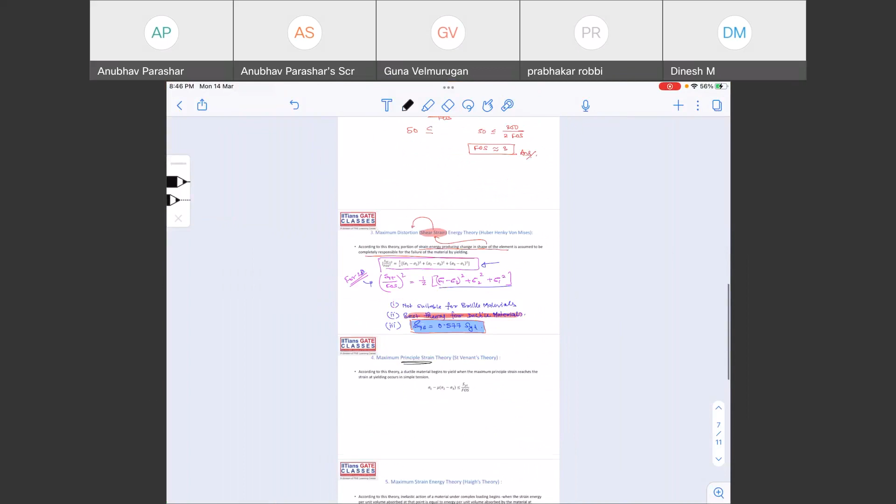So we were here, somewhere here last class. We have seen few things in theories of failure. We have seen what is a failure, why theories of failure are required, and we have seen maximum principal stress theory.

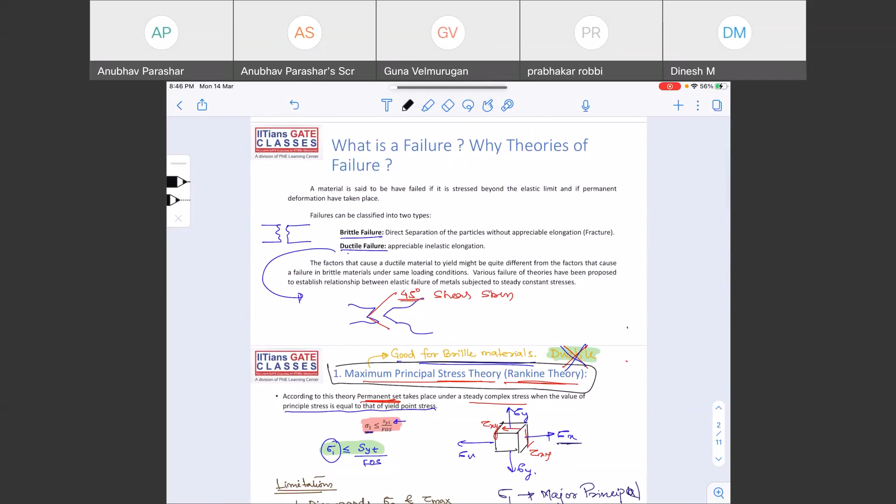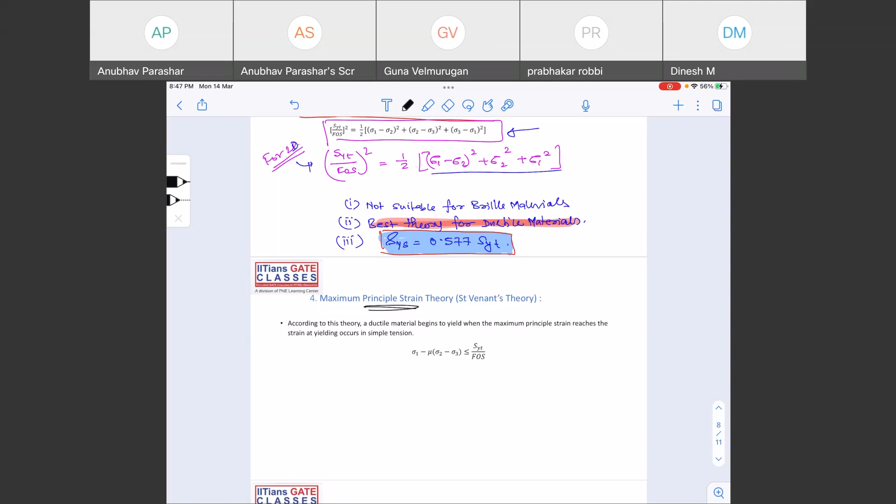We have seen maximum shear stress theory, and we have seen maximum distortion energy theory. Apart from this, there are two other theories which are not very important because they are not much used, and hence there are not many questions from this. But still, let us know these theories and the small side questions that might be asked. So the fourth theory we will talk about is the maximum principal strain theory.

Maximum principal strain theory is also known as the Saint-Venant theory. According to this theory, a ductile material begins to yield when the maximum principal strain reaches the strain at which yielding

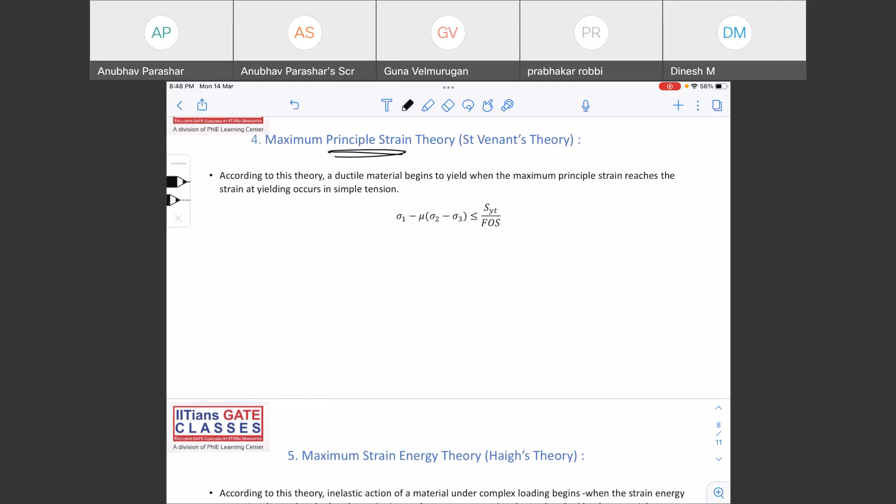occurs in simple tension. All of us know what a simple tension test is, right? It is carried out in the universal testing machine. So whenever the tension test is being carried out, the point, the strain at which the yielding occurs, when a ductile material reaches that point, that strain,

just hold on. When a ductile material, just hold on, give me 1 minute. Just give me one more minute. Hold on, guys. I'll just share another PPT. Where I have got some new questions. Just hold on, give me 1 minute. Yeah, I think I have got it. Just hold on, give me a few more seconds. Let's see on my screen.

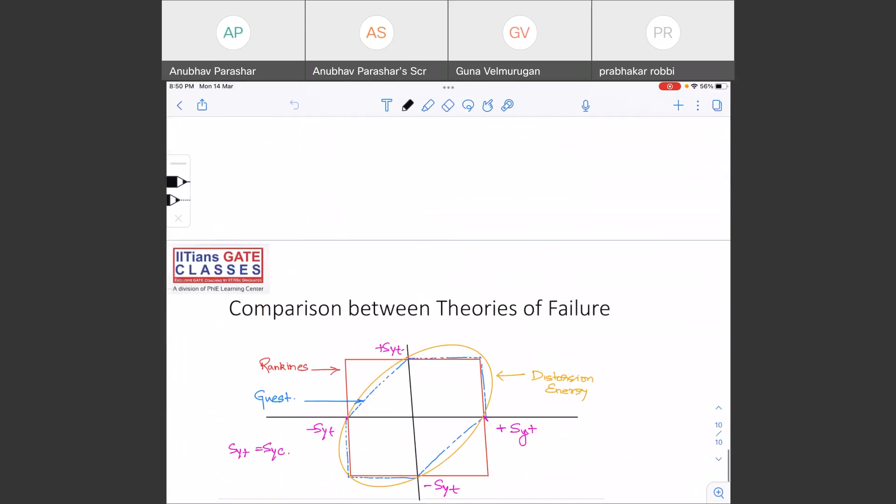Just hold on. Just hold on. Just hold on. It is now. Just hold on. I'm just there. Just about to share. Okay.

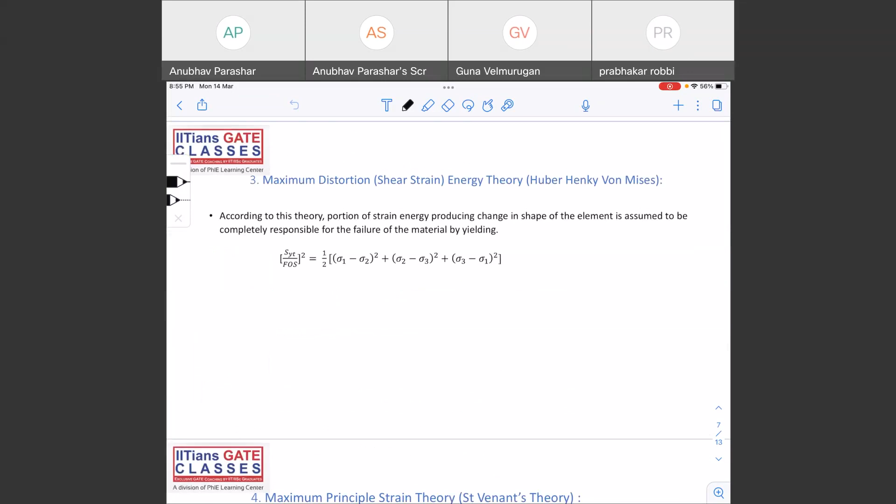So we have seen it till yesterday's class, till maximum distortion energy theory. We have learned where to use each. There are two other theories which are not asked very frequently. Very seldom do you find questions on them, because the first three theories are the ones which are most practical and give better results, and they are easy to apply, so they are being used. And we know which one is the best.

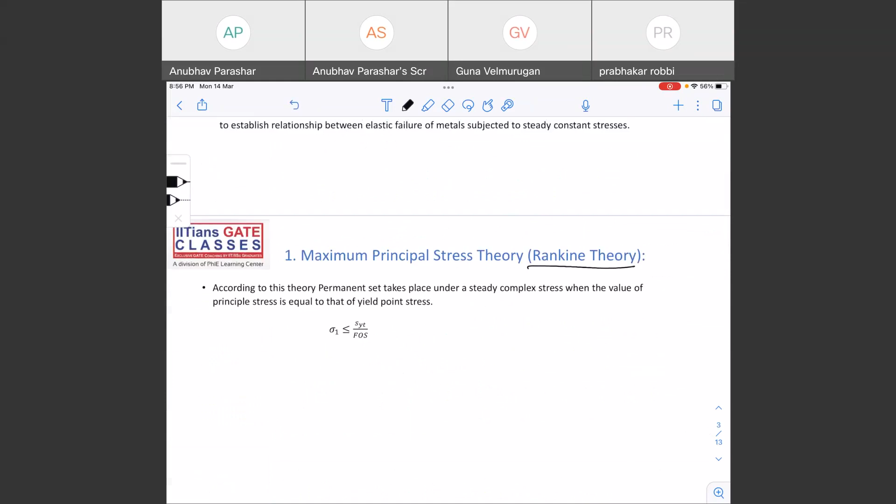For brittle material, we are going to use the maximum principal stress theory, which is also known as Rankine's theory. For all brittle materials. For ductile material, we can use maximum shear stress theory.

This is the second best theory. We have seen what are the disadvantages of this theory - it gives an error of around 15%. Then we have the maximum distortion energy theory, which is the best theory for ductile materials. And we have also seen the formulas.

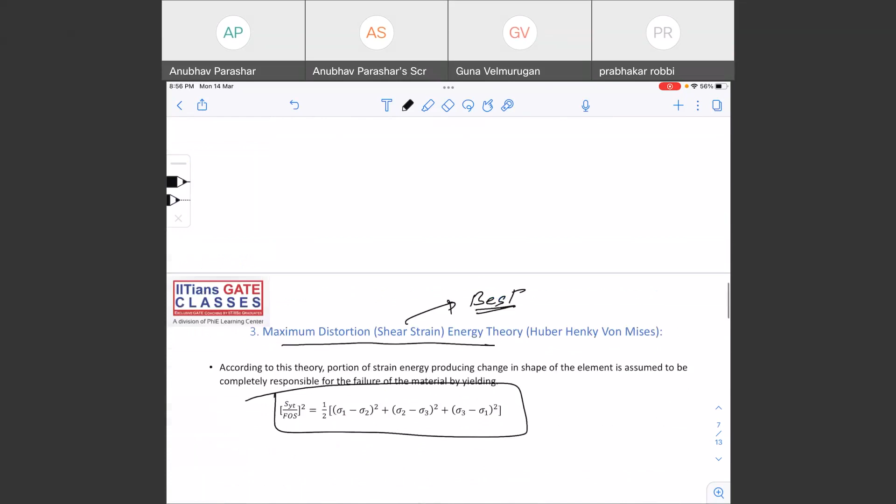These formulas are also important to remember. You will not get direct numerical questions. Mostly 99% of the questions will be theoretical and conceptual in nature. The concepts I'm covering here will cover each and every question. If you have gone through the question papers and assignments shared to you, you would have known that you could answer each question with just the last class.

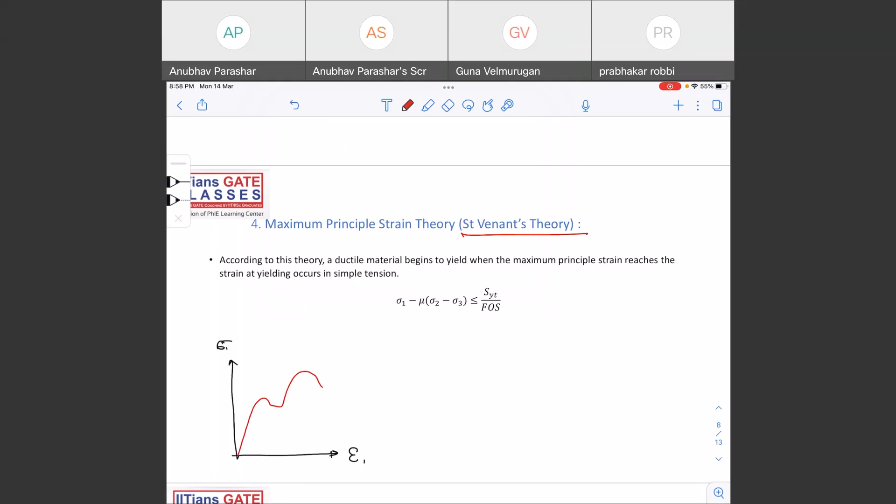Something like this - this is particularly for steel. This stress strain curve is particularly for steel. Not all ductile materials will have a similar kind of dip. So if you see it for aluminium, the stress strain curve for aluminium will be something like this.

You're not going to have the upper yield point or lower yield point, but you'll have the strain hardening region. This is the strain hardening region. You'll have the ultimate strength, then necking region, then the fracture point. All these points will be there, but it is not a clear distinction.

So why is this stress strain curve generally used? You'll find it in most books. Why is this stress strain curve used? This belongs to the family of steel. Why is it used? Because it gives you a very clear picture of the different points.

First you have the proportionality point, then elastic point, then upper yield point, lower yield point, then the strain hardening region, ultimate strength, proportionality limit, elastic limit, upper yield point, lower yield point, strain hardening region, ultimate strength, and finally the necking region. This is the necking region.

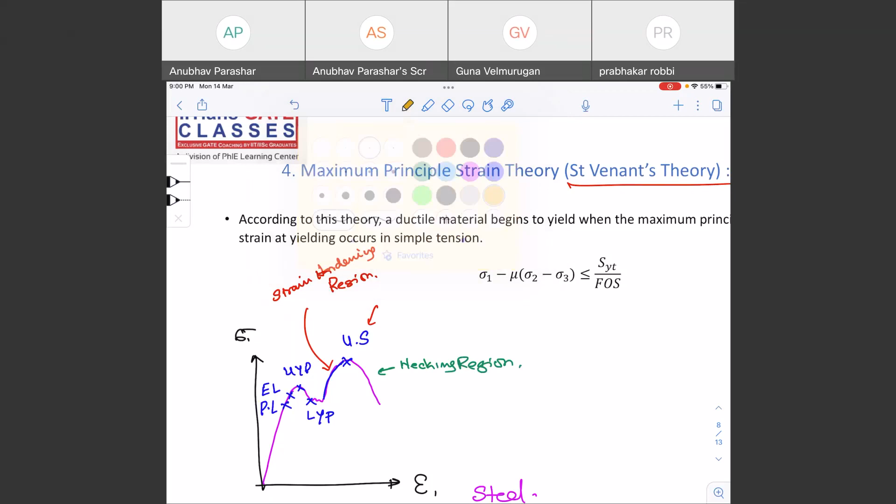They will give you a certain region and ask you which region this is. So let us just try to understand this.

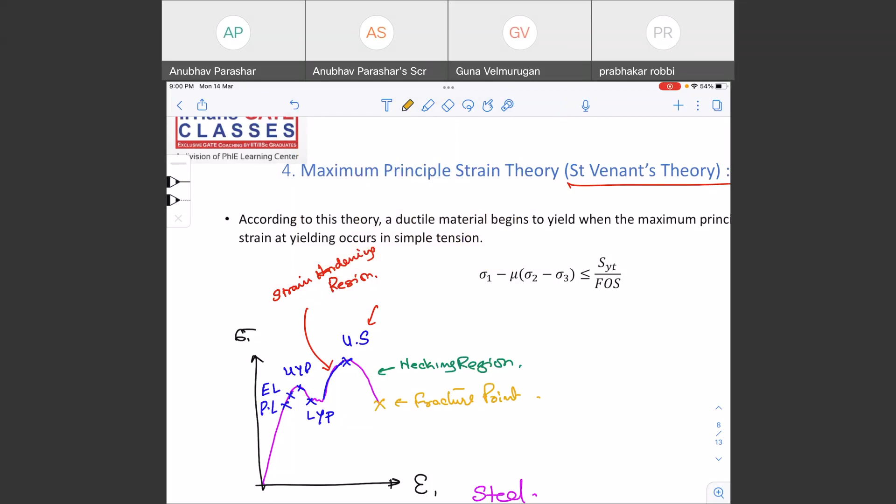Whatever is being said in this line, the definition, is also important because they ask questions on it. I'll show you some questions. You'll have to answer those questions based on whatever you have studied. Now let us come back to the definition.

According to this theory, a ductile material begins to yield when the maximum principal strain reaches the strain at yielding in a simple tension test. So what is this? This is basically nothing else but a simple tension test, conducted in a universal testing machine, UTM. Now, when has the yielding begun?

All of you please concentrate. When did the yielding begin? This is the point when yielding began. So what is the strain? This is the strain level, the strain when yielding starts. This strain will have some value, let's call it epsilon Y.

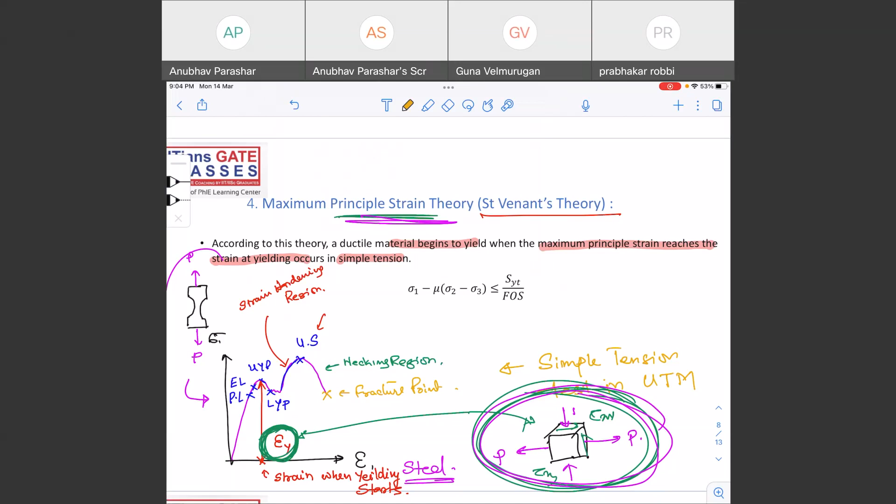A definition is a little bit important, I will tell you how and why. I don't know if you'll be able to absorb each and everything or not, because no doubt we are going a little bit fast. You should be given much more time, but still try to absorb whatever is possible.

So again, it has a formula, and the formula is also important: Sigma 1, the major principal stress, minus mu times (sigma 2 plus sigma 3), should be less than or equal to SYT divided by factor of safety.

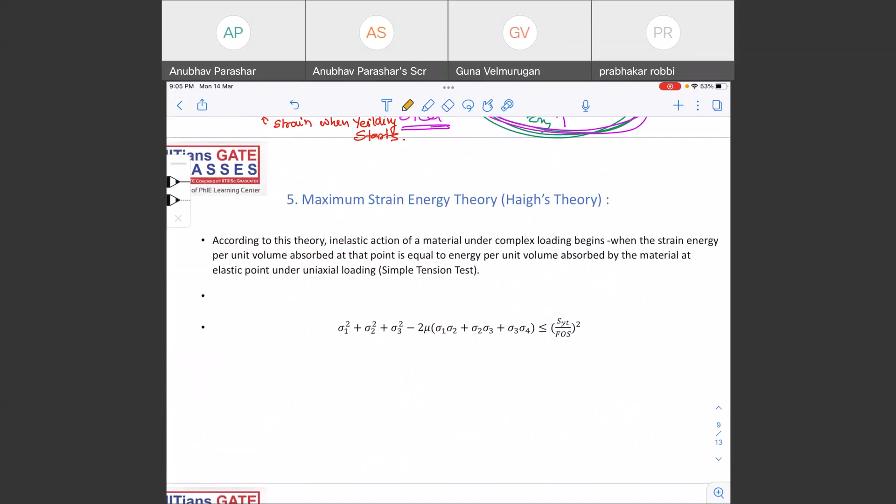Okay, so this is maximum principal strain theory, right? So we have another theory, that is the maximum strain energy theory. The last of all the theories. There are more theories even after that, but those are not very important with respect to our syllabus. There are more theories like octahedral stress theories also, but these questions are not being asked, so we'll just limit ourselves to this maximum strain energy theory.

Right, so let us go through what is the definition. What does this theory say? It says that inelastic action. What do you mean by inelastic action? Means the elasticity is over. If the elasticity is over, what does it mean? Means plasticity is beginning. What do I mean by plasticity is beginning? It means that the plastic deformation has started. If I'm saying inelastic action, see, if your concepts are clear, these terms should be very easily understood, right? This means plastic deformation.

Plastic deformation. So according to this theory, plastic deformation of a material under complex loading begins when the strain energy per unit volume absorbed at the point is equal to energy per unit volume absorbed by the material at elastic point under uniaxial loading. Again the same thing. Why have I stressed so much in the last slide? Because the same thing will help you understand this also. So we know this is stress, we know this is strain.

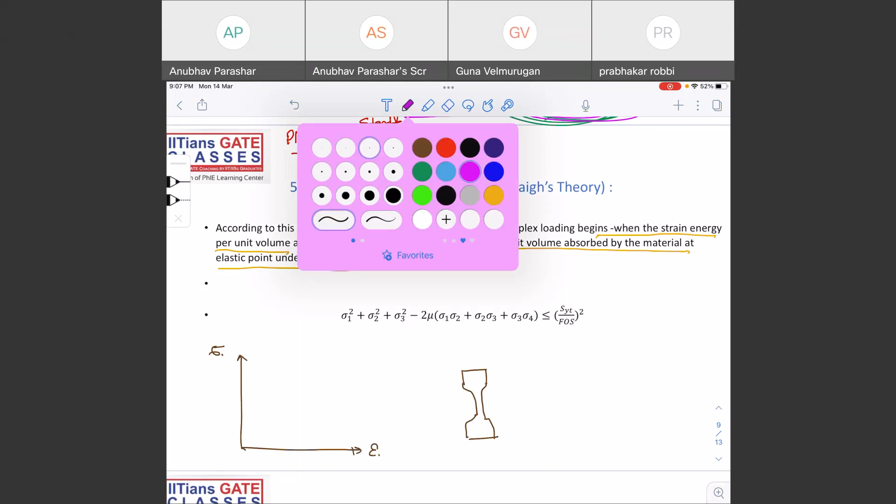So there's a simple tension test carried on a specimen. This is a standard specimen. On this standard specimen force will be applied, loaded on the universal testing machine. What kind of force will be applied? Tensile force will be applied. And if it is a ductile material, it will undergo necking, right? Then it will have a cup and cone fracture. It will have a cup and cone fracture. This kind of fracture will happen, okay, at the weakest point, whichever is the weakest zone.

Generally, the weakest zone will be between this to this. So it could be anywhere. This cup and cone fracture can happen anywhere, here, here, here, wherever whichever cross section is the weakest. That again depends on the material properties, right? So after the cup and cone fracture, this force versus elongation will be plotted on the stress strain curve. I'm not going into much detail.

So if it is a mild steel specimen, it will look like this, something like this, right? So what is the elastic point? This is the elastic point, right? After the elastic point, plastic deformation will begin. Almost elastic point and yield point, they are almost the same point. There is not much difference between the elastic point and yield point, right? So you can consider them to be equal unless and until specified in the question.

So this is where the yielding begins, or you can say this is where the inelastic action begins. After this point, if you load it, it becomes inelastic, means plastic deformation starts. So can you tell me what is the strain energy stored per unit volume? Which portion of the graph? This portion of the graph. Strain energy per unit volume is the area under the stress strain curve. So this area that you can see, right?

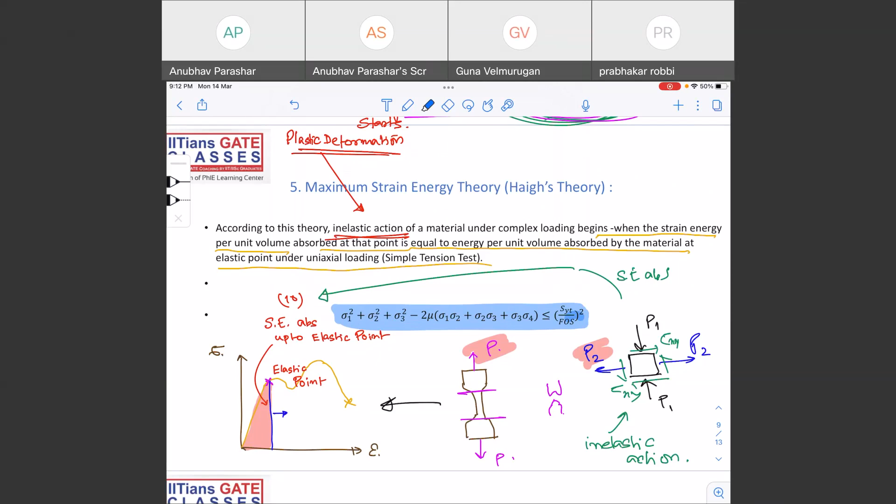Good. So apart from that, you'll also have to remember this formula. Okay. If you're falling short of time, what you do, you simply remember the first three, because the first three are compulsory. 99% of the questions will be from the first three. Okay.

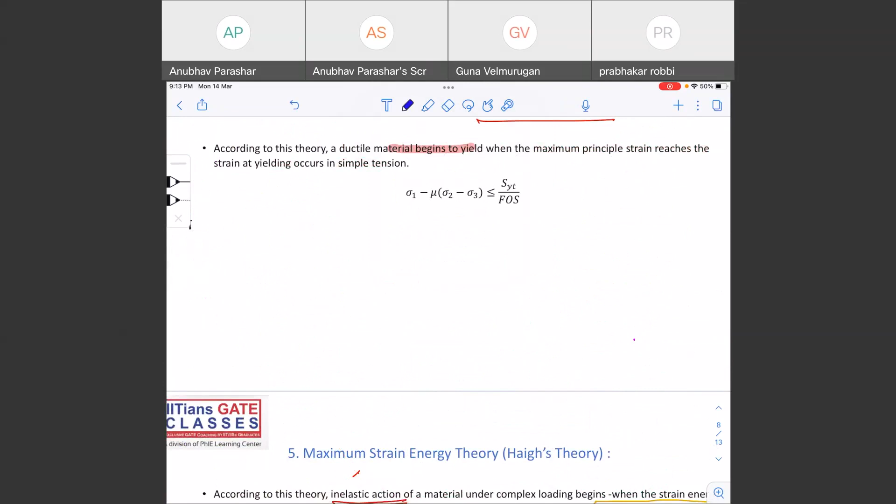One more point I will add here. For maximum principal strain theory, SYS means yield strength in shear, SYT the strength in tension. This ratio is equal to 1 divided by 1 plus mu. So if you take the value of mu as, let me say, 0.3, SYS divided by SYT becomes 0.77.

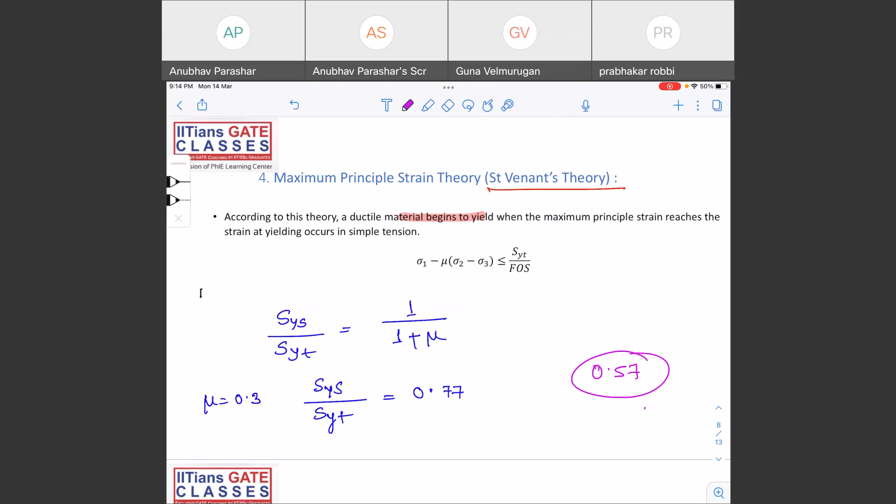The value is more than the actual, right? It becomes a little bit conservative. What is the actual value? The experimental actual value obtained from different experiments is 0.577. So which theory gives the accurate result? 0.577, that is the maximum distortion energy theory, right? Distortion energy or shear strain or von Mises theory. This is important. Please remember. These are the points that you have to remember.

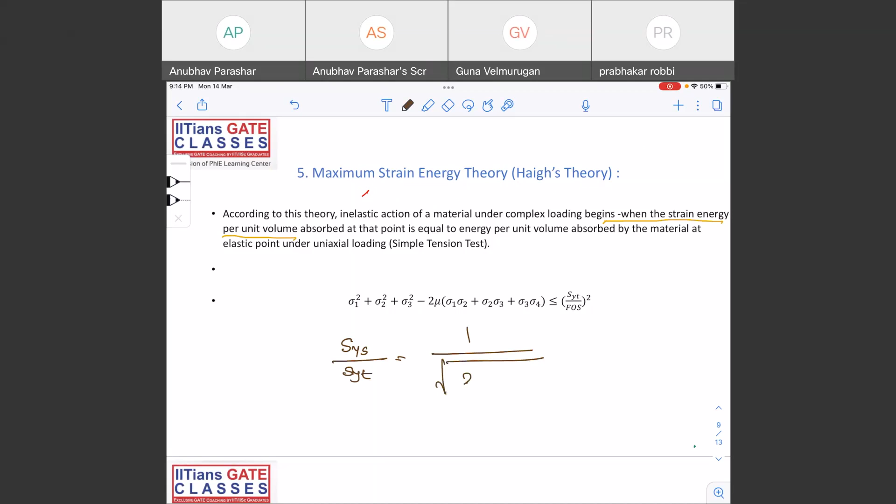Yes, good Guna. Very nice. Similarly, if you see for this, what is the relationship between SYS and SYT? It is 1 divided by root of 2 times 1 plus mu. This type of question is preferred. So please remember this one.

Along with this, definitely you have to remember the formula, right? And then a little bit of definition. At least understanding; you should not by heart the definition line to line. But one more thing: along with the maximum strain energy theory, you also have to remember the name of the scientist.

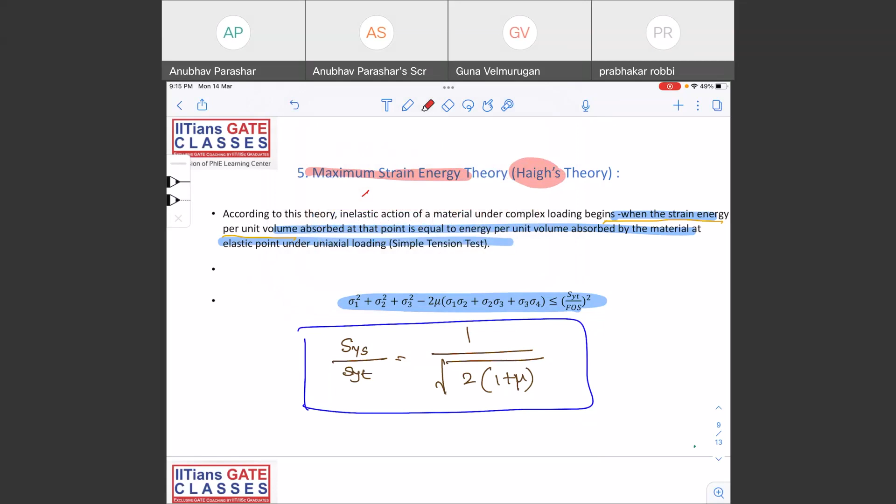Many a times the theories are asked with respect to the scientist. So it is important. Let us do some questions, then we'll come back to this. I want the answer from you guys. Let me see how much you remember. So this is question number 1. Tell me the answer for question 1 and 2.

Tell me the answer for question number 1. Prabhakar. What about you? Very nice. Good. So question number 2, tell me the answer. We have seen this yesterday and really tried to understand it in full. Not suitable for ductile material.

A little bit you'll have to think also. Okay? If you have paid attention in the class, it will be done. Good. Prabhakar is saying D. What about Guna?

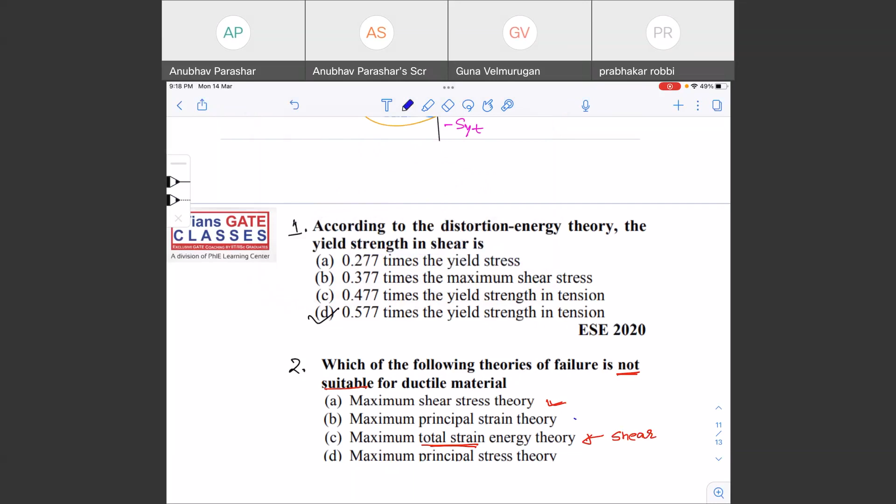So it has given some amount of focus to shear, right? Let me think about principal strain theory. If you remember the formula, let us go back to the maximum principal strain theory. It is using sigma 1, sigma 2, sigma 3. Now you would remember how to find out sigma 1, sigma 2, sigma 3.

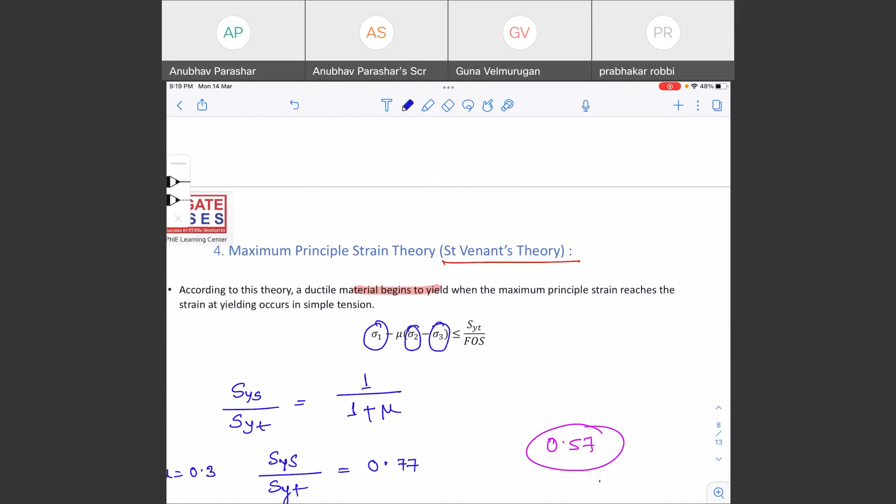If you want to find out all three, you're using the shear stress to some extent. Just remember the formula. It is also good for brittle material, but not good for ductile. If you talk about principal strain theory, it gives you satisfactory results for brittle.

But for ductile, you will generally not use it. Will prefer not to use it for ductile. Cannot be applied. But in this type, I very purposefully took this question. All the other questions are very easy, direct, straightforward questions. I very purposefully took this question, okay, because I want to explain something to you.

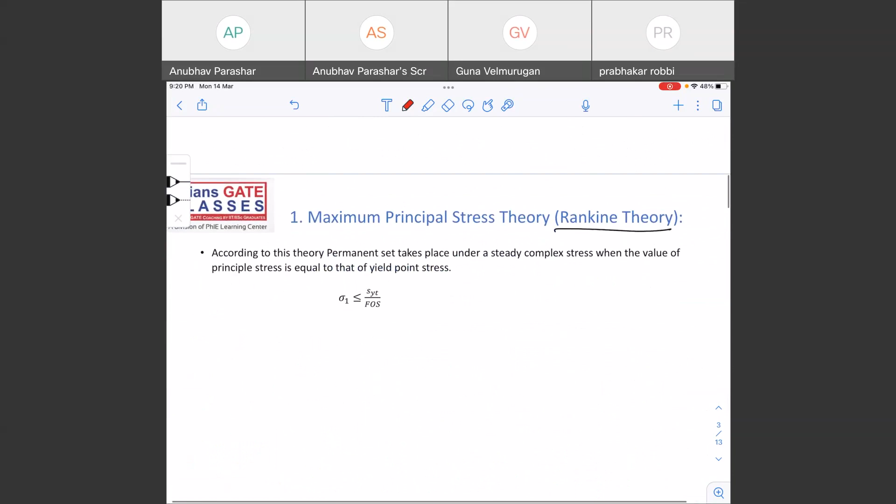Okay. Out of all these four, if you see maximum principal stress theory, it is using only one of the principal stresses. Let us go back to this. It is just using the single principal stress. It is just completely ignoring each and everything else, right?

So if you see among all the options, which is the worst possible option for ductile materials? That is what you have to select. Which is the worst possible option for ductile materials? Are you getting my point? This definitely cannot be it. This is not the answer because of shear stress; ductile material fails in shear, right? So definitely not this answer.

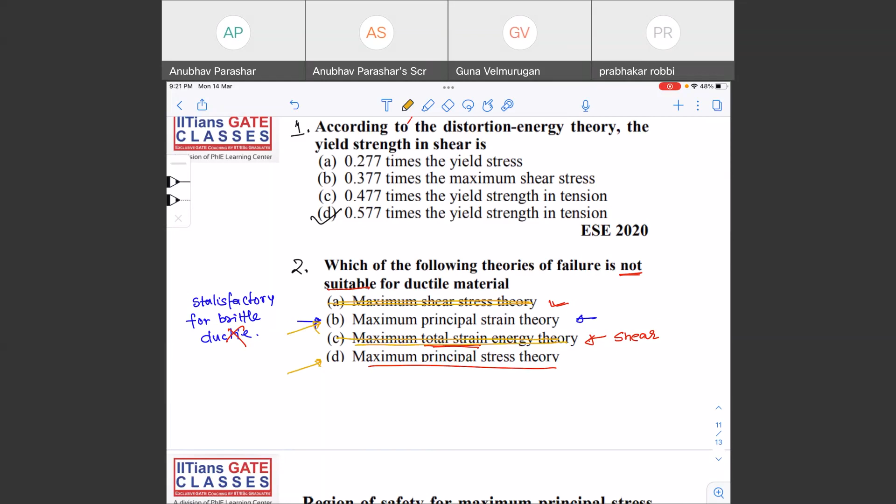Total strain means normal strain plus shear strain. Some consideration is there, right? Now you are left with option B and option D, and both of these are not good for ductile material. But you have to choose only one option. You have to choose the worst possible. So what is the worst possible? That is the maximum principal stress theory. We'll never use it for ductile.

So similar kinds of questions will also come sometimes, because PSUs do give you similar kinds of questions where you might get confused. All the other questions you can directly answer, a one line answer. If you have attended yesterday's class, you will not face a single problem in other problems. So this was a little bit tricky. I thought I will explain it to you in class. So I hope it is clear now.

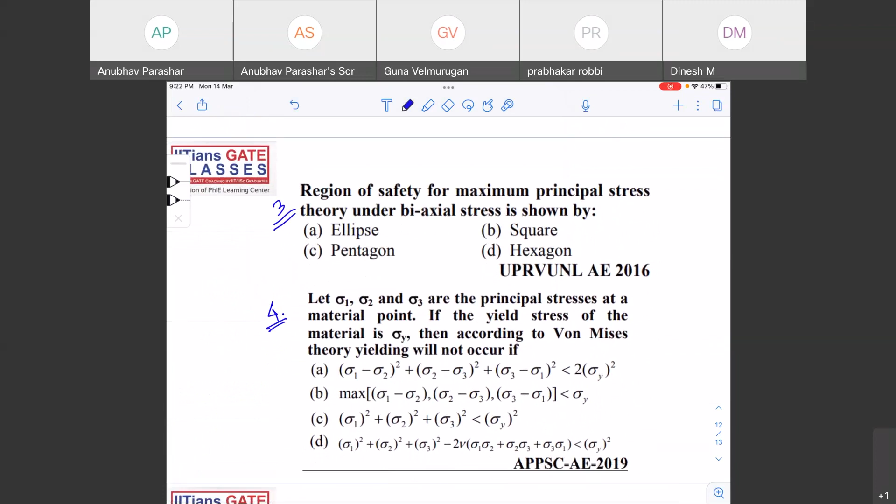Question number 3, we are going to attempt after we do a little bit of theory. All of you try question number 4. Tell me. Which theory is it asking about? It is asking about von Mises. So if you don't know which one is the von Mises theory, you will not be able to answer.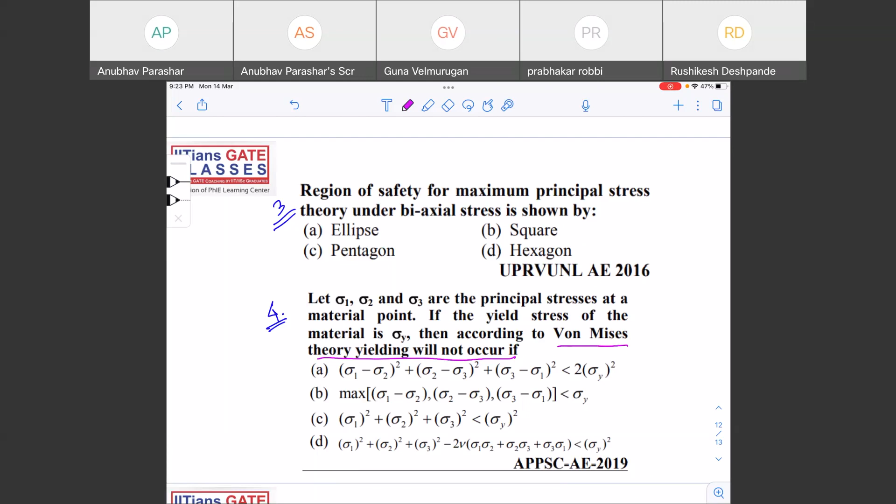Do you remember which theory is the von Mises theory? Rushikesh has given the answer as B, but I am a little bit doubtful. First, let us check which is von Mises theory. That is why I have already told you to remember the name of the scientist along with the name of the theory. So this is the formula. You can see direct formula based questions are also being asked.

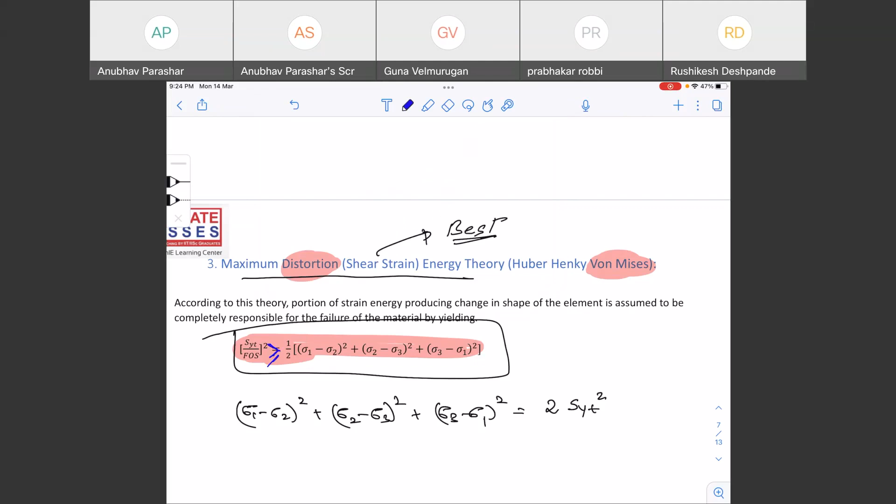You can rearrange this formula a little bit. In the given question the factor of safety is used as 1. So you can simply say (sigma 1 minus sigma 2) squared plus (sigma 2 minus sigma 3) squared plus (sigma 3 minus sigma 1) squared is equal to 2 times SYT squared. To be precise, it should be smaller than or equal to. While solving numericals, we'll consider them equal. So you have to search for this one in the options.

Right, Guna? Very nice. This is maximum distortion energy theory. Now you should be able to answer question number 4. See, if your concepts are clear, if your basics are clear, if I give you 100 questions on these things, you'll be able to solve all the questions. So the most important point is to have a very good understanding of the basics.

Rushikesh, you have seen yesterday's lecture? You've gone through the recording, I hope so. Rushikesh Deshpande. Good. Prabhakar had already answered. Because otherwise you might be finding it a little bit difficult. No worries. Anyway, we are going to start a new chapter today. It is just a matter of another 15 minutes.

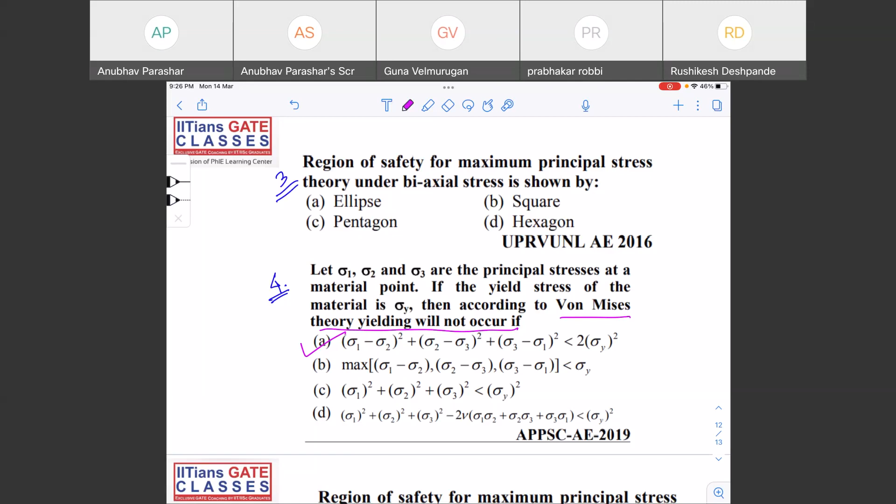Again, we will do this. This question got repeated. No issue. Tell me about this question. We'll see this question now in a short way. Designing of power transmission shafting is based on... it should not be shafting, actually it should be shaft. It is a noun, not a verb. I didn't get you, Prabhakar. So it is a 3D object.

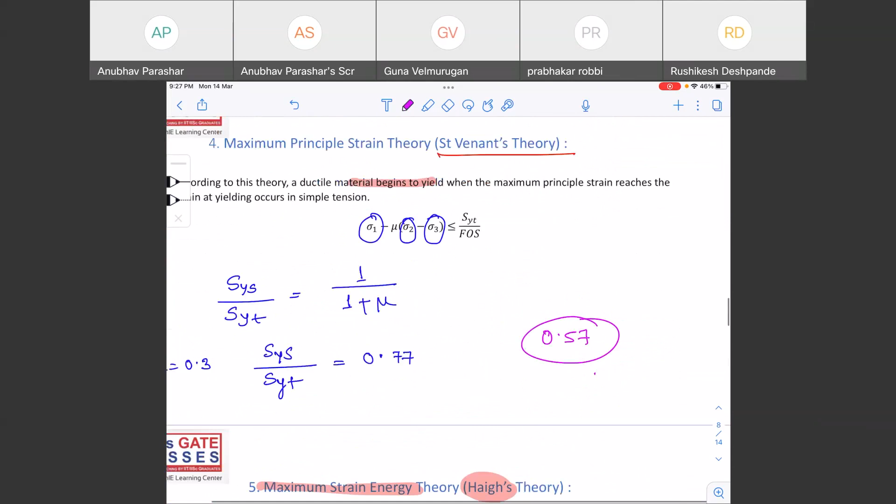It's not The Height's theory, it's actually Haigh's theory. They might have misprinted it. Good. Now you get to know what Saint-Venant's theory is. You have already seen it in today's class. Saint-Venant's theory is the maximum principal strain theory. What is Haigh's theory? You can say Haigh's theory is the maximum strain energy theory.

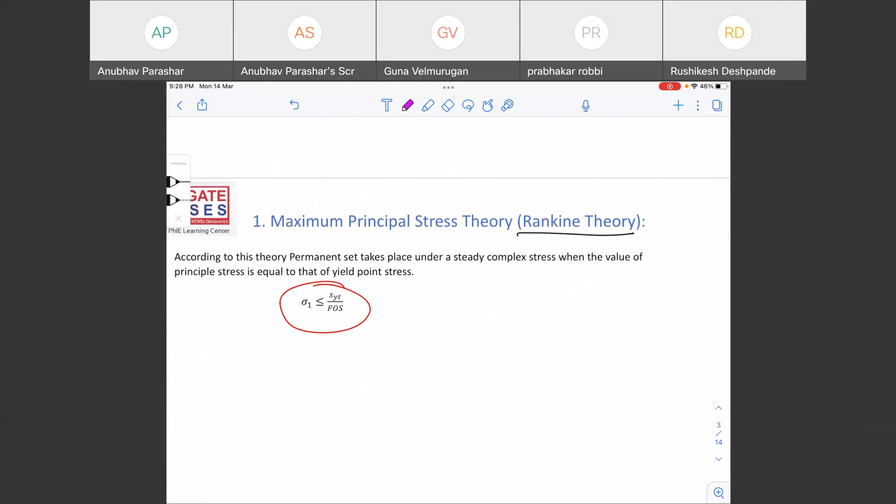What is Rankine's theory? You have seen it in yesterday's class. Rankine's theory is the maximum principal stress theory. So all of us now know that these three theories are not suitable for ductile materials. So all these three will be cancelled out: Saint-Venant's theory, Rankine's theory, Haigh's theory. So the answer will be A.

So I'm putting a variation now. Question number 6: the same question, but in place of option D, in place of Height's theory, suppose I'm writing von Mises theory. So what would be the answer?

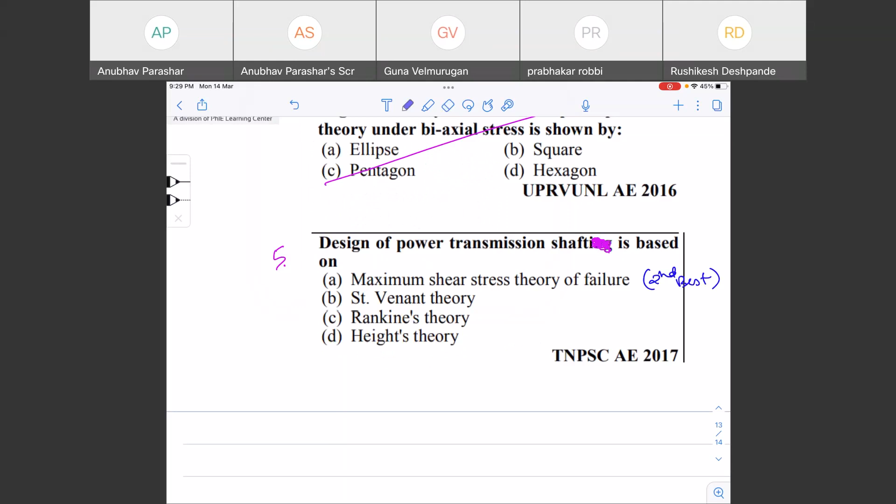The answer would be D. We have seen in the last class that von Mises theory, that is the distortion energy theory, is the best for ductile materials. This is the best, and this is the second best. So definitely we'll go with option D in this case. But if option D is not given, then we will go with option A. So with this much knowledge, you will be able to answer.

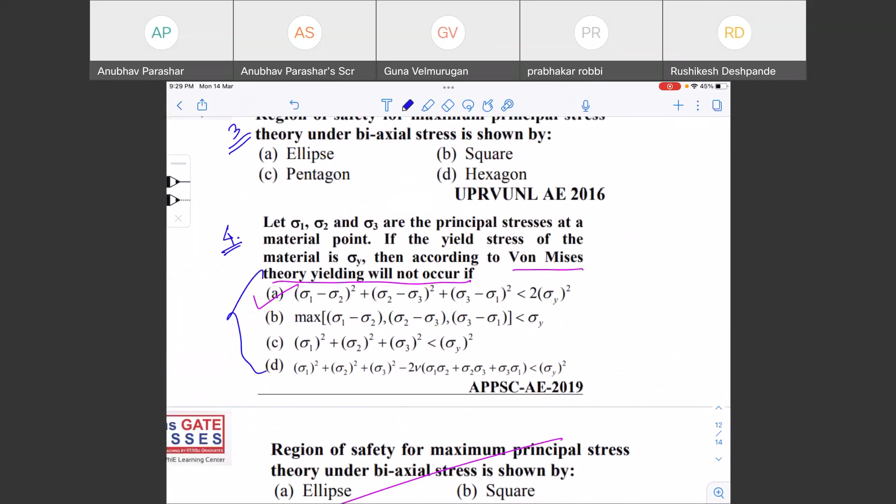See, formulas are asked. Many times, in 1-2 questions, they've asked definition kind of things: the relationship between yield strength and shear strength, which is suitable for ductile material, which is suitable for brittle material. These are very repetitive questions, and this is a very short chapter where, if a question is asked, you can easily score marks.

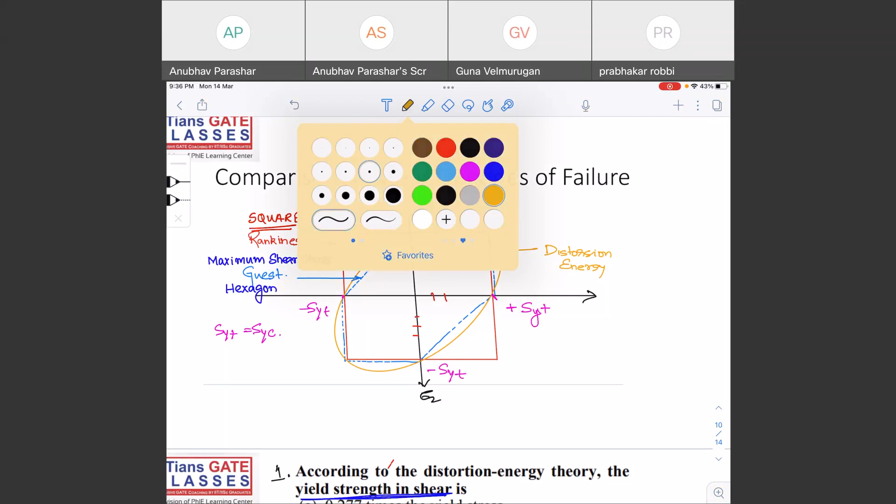I hope you are getting my point. All you have to do is remember the shape. Then you have distortion energy theory. Now, can you tell me which one is distortion energy theory? Another very important name for distortion energy theory is von Mises. Many times you'll get this name, von Mises. So what is the shape of this distortion energy theory?

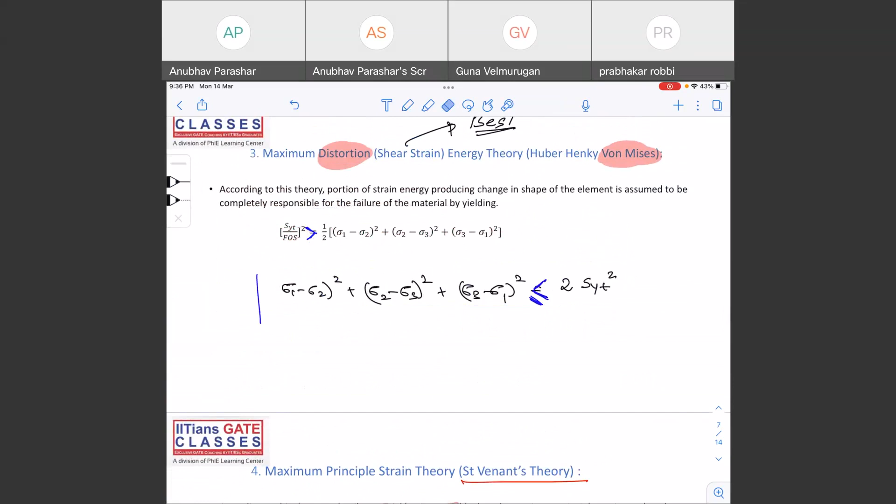When the equation of distortion energy theory is plotted on a graph paper, which one? This one. This is the equation for distortion energy theory, von Mises. So when you plot this mathematical equation, what exactly you are going to have is an ellipse.

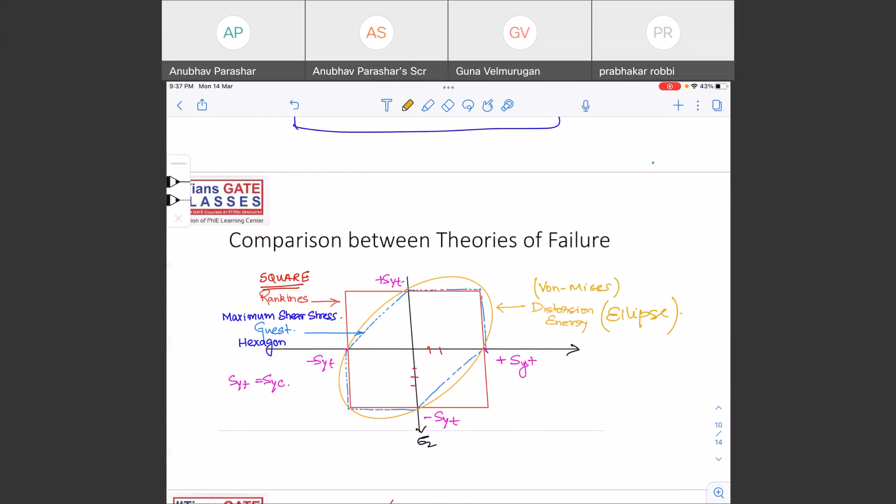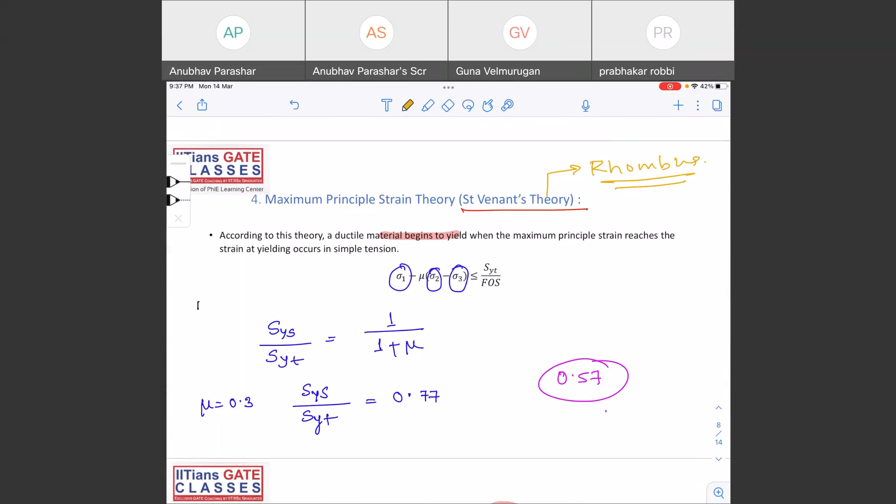And what about the other two? I can share the other two also, if you want to remember. For example, maximum principal strain theory is a rhombus. But if you don't have time, don't remember this; if you have time, you can. Maximum strain energy theory is again an ellipse. But cover these two only when you are done with the first three. The first three are most important: maximum principal stress theory, maximum shear stress theory, and maximum distortion energy theory.

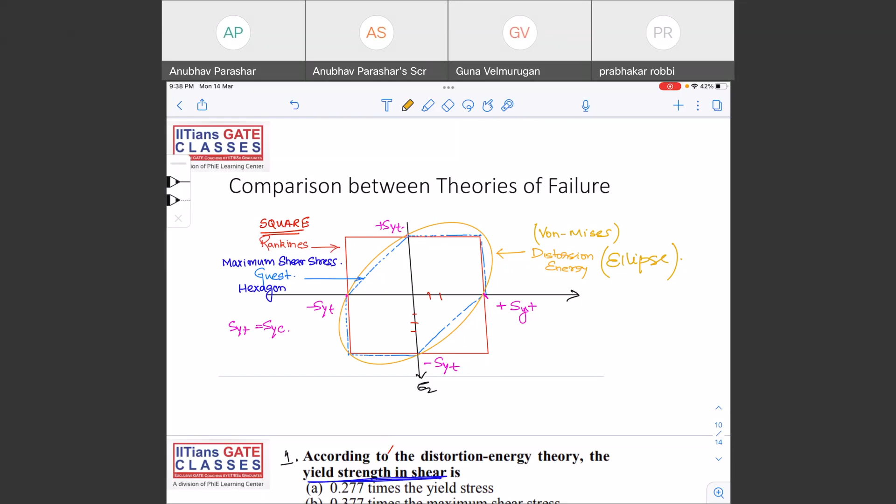So maximum principal strain theory is a rhombus. And the fourth one, maximum strain energy theory, is an ellipse. But at least remember these three. If you remember these three, 99% of the time your work will be done, because we mostly use these theories, specifically distortion energy theory. The best and most used theory is distortion energy theory. So be very good with the first three theories with all the formulas.

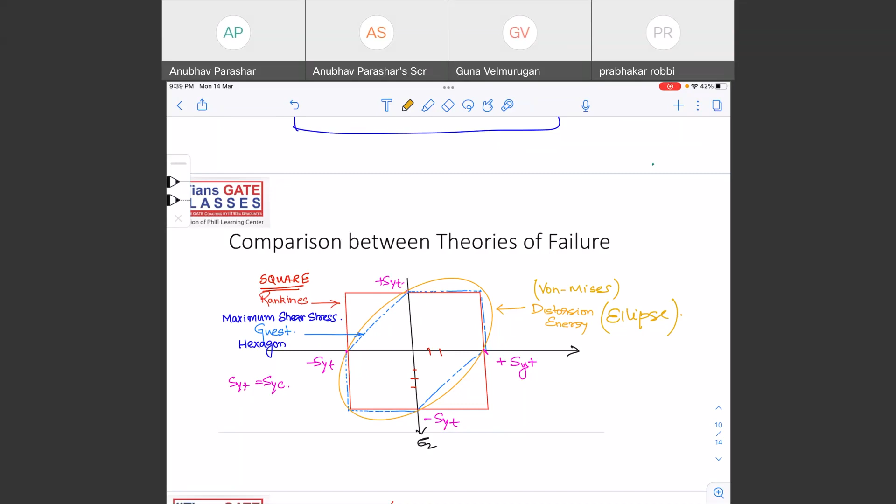The shape of the graph, at least the definitions, and their limitations. We spoke about limitations yesterday. So now I think you can answer this question. Question number 1, tell me what is the answer? B. Question number 1 answer is B. Now see, it has become so very simple for us.

So it is very important: if you know the concepts properly, things are very simple, and clearing these exams is very easy. I can give you 500 questions, but if you don't develop the concept properly and there is a slight change in the question, you will not be able to answer it. That is why we are focusing more on the concepts. Tell me if you have any doubt here. Good.

So now we will enter the next topic. I'll just get back. We'll start our next chapter.

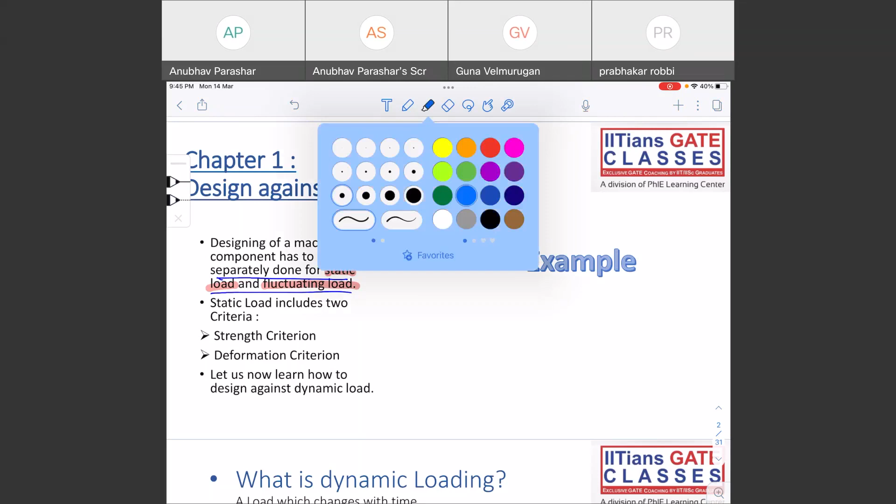So let us first understand what exactly is design for static load. You've already done that in strength of materials. Whatever you studied in strength of materials is mainly design for static load. So basically, there are two criteria when you are designing for static load: the strength criteria and the deformation criteria. Let us have a simple example. This is a machine element, right? You're loading the machine element this way. Now there are 2 points that you need to check to design it for static load.

So what is the stress generated? The stress generated is equal to force divided by cross-sectional area. First, you have to check that the stress generated, that is force divided by area, should be smaller than the maximum normal stress. I'm just taking the example of normal stress; similarly it is also for shear stress. Or let me give it a better name, that is permissible stress. Or you can say it this way also: whatever stress has been induced should be smaller than SYT. Or if you want, you can also add a factor of safety term.

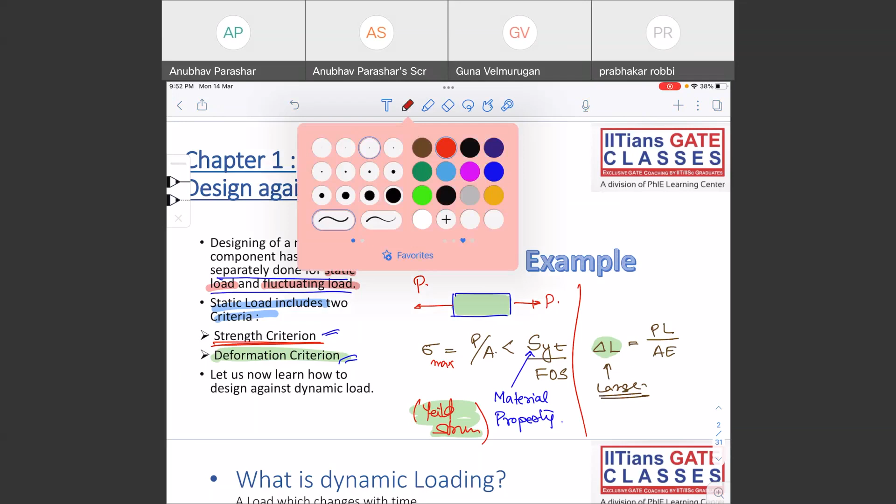That is also being studied, these two criteria. This is what is known as designing for static load.

Now suppose the loads are more complex loading, then you will use theory of failures. This is simple, right? Whatever you are seeing in the picture is uniaxial loading, only one tension load - very simple to analyze.

But if it is a complex loading, there is more than one load in more than one direction. What you have to do is find out sigma 1, sigma 2 - that is major principal stress, minor principal stress. Then you have to use the theories of failure, then design it for static loading, making sure everything is within limit.

I hope you're getting the importance of theories of failure. You should be able to link it by now - why you have studied theories of failure as the first chapter. This is a transition from strength of material to machine design.

So under simple loading, uniaxial loading, this is what you are going to study - very, very simple to analyze. The sigma max, that is P by A, should be smaller than the yield strength divided by factor of safety. And you also see delta L is equal to PL by AE, which should be smaller than the design deformation. So this is for uniaxial loading.

Now for complex loading, you will first find out using your principal stress theories - you might use Mohr circle to find sigma 1, sigma 2, and tau max. Then you'll go to theories of failure to check your design stresses. For ductile materials, you'll use maximum distortion energy theory, and for brittle materials, maximum principal stress theory. Using these theories, you'll design. This is basically design for static loading.

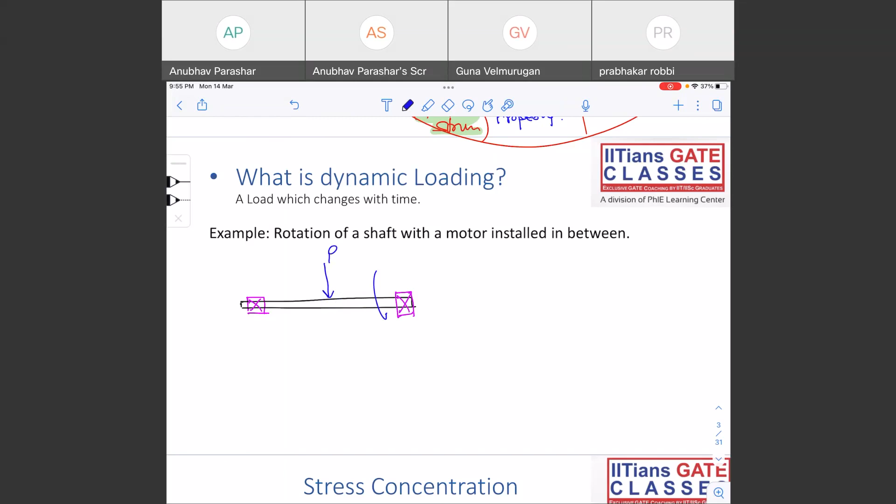In place of the motor, I'm just showing you a load P, because the weight of the motor will be acting downwards - a weight force P in the downward direction. And what is happening to the shaft? The shaft is rotating.

Now let me make this a bit bigger. Let me mark two points - please understand. Let me take a point A on the top of the shaft, and a point B on the bottom of the shaft. Now what kind of loading is this?

So what will be this positive bending? What will be the stress on the top fibers? The stress on the top fibers will be compressive in nature - you learn about sagging and hogging. Top fibers mean point A, it is compressive in nature. In bending of beams, you learn all these things: sagging, hogging, positive bending.

What about point B? The point B will be in tension.

Now, after half a revolution - what is half a revolution? It means after 180 degrees, because the shaft is rotating, it will make half a revolution, and then after some time a full revolution. So after half revolution, what will be the orientation of the shaft? The shaft will look like this - however, the point B is now on top and point A is at the bottom.

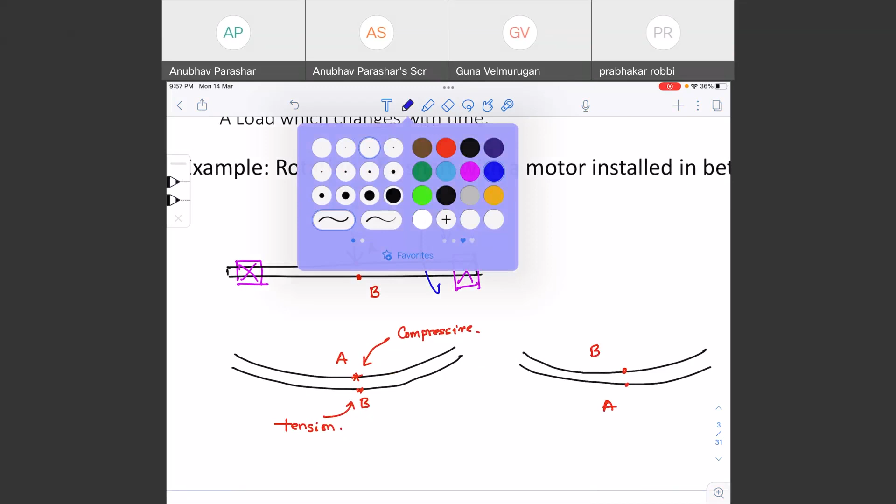Now the point B is under compression and point A is under tension, after half revolution, that is 180 degrees. This is the condition. So if you see again after half revolution, point A will be on top - it will be under compression, and point B will be under tension. So for any point you're taking, what is happening to that point?

It is going into tension, then compression, tension, compression - repeatedly cycling between tension and compression.

So when this kind of loading happens, that is known as dynamic loading. What does dynamic mean? Dynamic means it is changing with time. So this kind of loading means the stress is changing with time. This kind of loading is known as dynamic loading, and this is what we are going to see.

Unbalancing is not happening here - unbalancing is again a different thing. We are not talking about unbalancing here, we are simply trying to figure out what dynamic loading is. Unbalancing is again a different thing - that is grading of shafts and all those things we'll see later on. In vibrations, you are going to see grading of shafts.

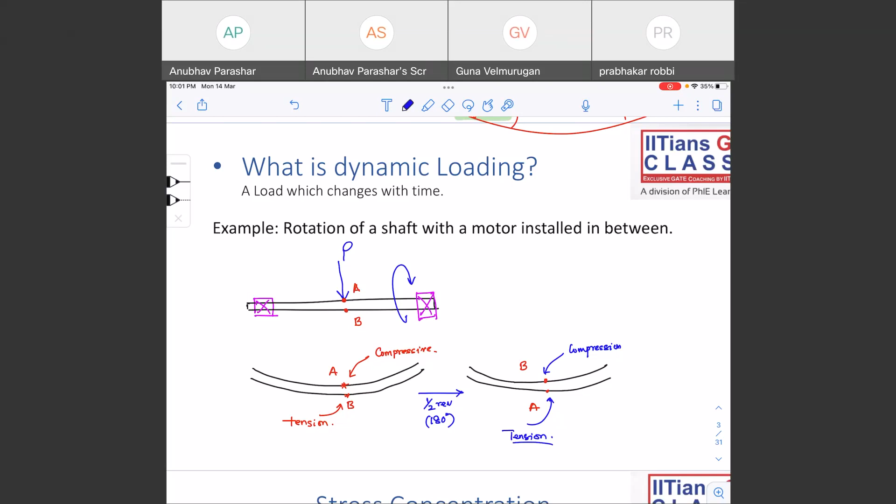The yield strength of the material is around 200 megapascal, but the failure is happening at a load of 70-80 megapascal. Scientists were very much confused why it is happening. Then they started experimenting and they found out that it is because of the dynamic loading that this kind of failure is happening.

So that's why a separate chapter came up, and we're going to see why this dynamic loading causes early failure. The main reason is stress concentration, so we'll see what exactly is stress concentration. Then you will slowly try to understand what is the fatigue failure.

Fatigue failure is a failure that happens because of dynamic loading. That is what we're going to see slowly. So what is that stress concentration? Now stress concentration is defined as localization of high stresses due to irregularities.

I'll just mark you the points: high stresses due to irregularities present in the component and abrupt change in cross section. We'll try to understand what this is.

Let me say this is a member. What you can see on screen is the member. There is some amount of load, a tension load, let me say tensile stress. So what is the stress developed? We'll say stress developed is equal to force divided by area.

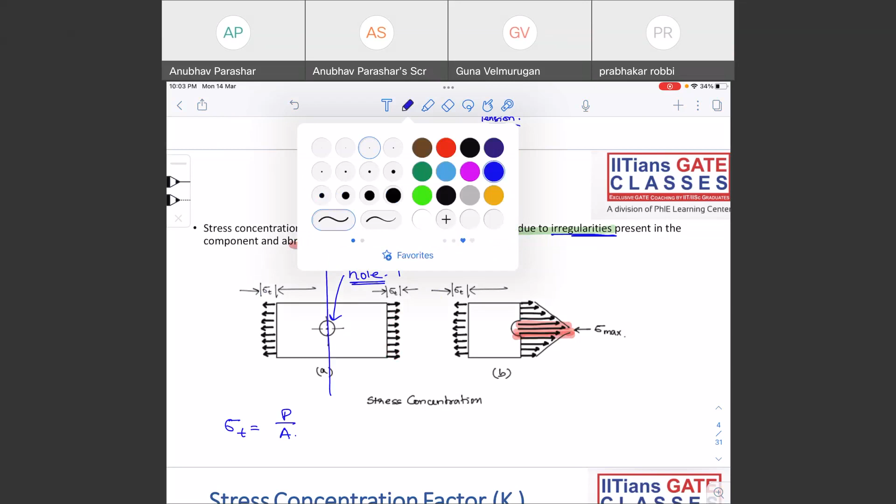So what we have done with this element, we have cut it into two parts, and we try to analyze what is the stress at this area. So when we try to analyze what is the stress at this area, we have seen the stresses are much higher than the nominal stress that is given by the SOM equation.

Strength of material equation has given us some stress, right? What is force divided by area. But when we try to see practically, how do you see? We generally use strain gauge. You will put the strain gauge and try to evaluate the strain, and from the elasticity, from the Young's modulus of the material, we will try to calculate the stress.

This is the practical way of calculating stress. What we will do is put a strain gauge here, and use a Wheatstone bridge. A separate circuit will be there, so we'll calibrate it, and we'll get the amount of strain because of the load.

So from the strain, if you know the material, we have selected the material, we'll be knowing the Young's modulus E. From the stress strain relationship, we'll find out the stress experimentally. So the stress that is found near this hole was much larger than the stress given to us by the basic strength of material equation.

So then we got to know, okay, this is the cause, this is one of the causes. Now we are going to get deep into this. This high localization, this extra stress, this concentration of high stress is nothing else but it's called stress concentration. This high stress that we see here, this extra stress, is nothing else, it is called stress concentration.

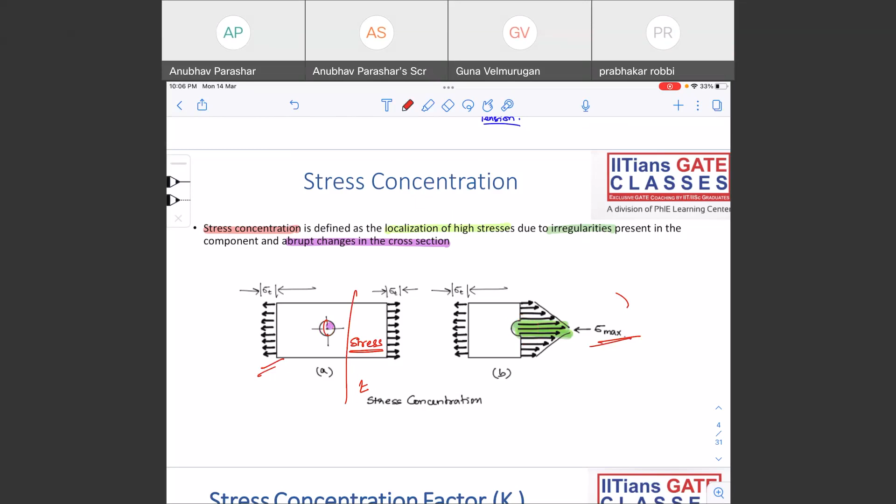That is why the stresses at this area are much higher than the nominal stress. Okay, so this kind of high localization of stress is nothing but stress concentration. Okay, so there is a factor which is known as stress concentration factor, because that is a definition, but we need some value that needs to be assigned.

Whatever you have learned, this is theoretical. How are you going to use this theory in your numericals to calculate the stress? Okay, there must be some numerical term assigned. So what is the numerical term assigned? It is known as a stress concentration factor, right?

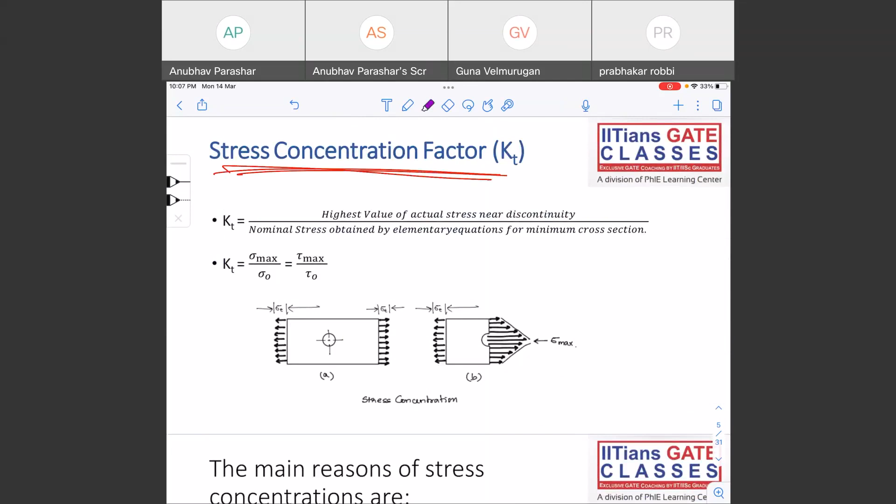So it is given by highest value of actual stress near the discontinuity, that is sigma max, divided by nominal stress obtained by elementary equations. That is the strength of materials equation, nominal stress. So what is sigma naught? Sigma naught is a nominal stress that is given by the elementary force divided by area, right? Or if it is complex loading, you have to find out sigma 1, sigma 2.

Okay. And what is sigma max? Sigma max is the maximum, highest value of actual stress near the discontinuity. So how to find out this highest value of actual stress? That is through experiment. It came from experiment. Okay. So experiments have been carried out on many different materials, right? With different change in cross section. So what are the different changes in cross sections possible?

For example, there is a hole. Hole can be keyhole. It could be other holes drilled for some purpose. What else? Fillet joint. Suppose this is the material, sudden change in cross-sectional area. You can see the cross-sectional area has reduced for the material, right? So these are the sudden changes of cross-section happening, right?

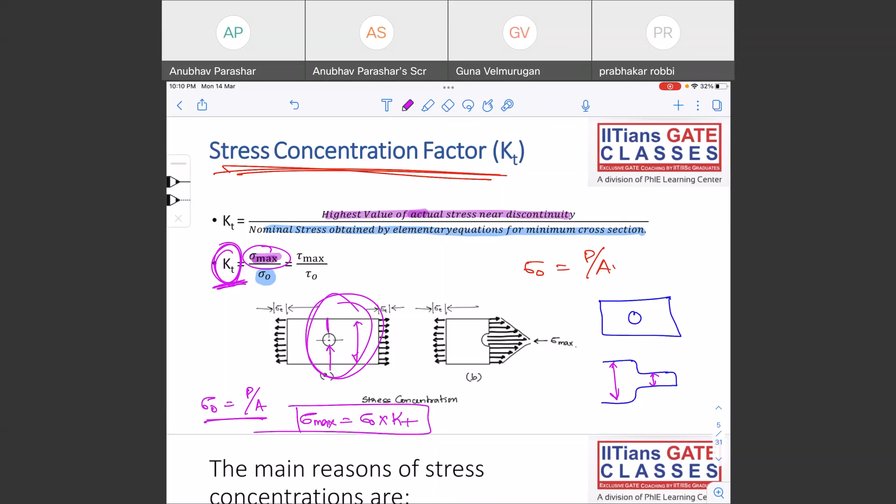So let us now see what are the main reasons for stress concentration. Stress concentrations are because of variation in material properties. Okay. Materials will have cavities, internal cracks, air holes, foreign particles. All this results in stress concentration. Right? If there is a foreign particle, there are so many defects.

Because of these defects, foreign particles, what will happen? The bonding in the vicinity of the foreign particle will not be good. Right? So there will be presence of stress concentration. Load application at a point or over a very small area. Suppose this is a column and you're applying a load here. So definitely the stress will be very high at this point.

Stress concentration. Abrupt changes in cross section we have seen, right? Discontinuities in the component, there will be discontinuities, right? Lot of discontinuities because of material properties, because of defects in manufacturing. Yes, you're learning manufacturing processes, right? There will be so many defects in manufacturing, be it casting, machining, extrusion, forming, rolling, whatever manufacturing process you do, there will be defects, right?

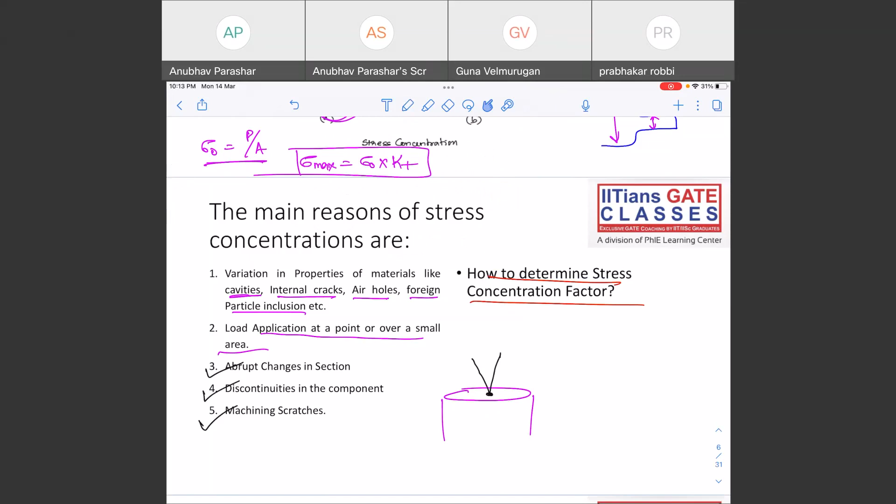Now let us see the effect of stress concentration factor on ductile and brittle materials. Let us try to understand this. This is very important. धीरे धीरे we will keep on understanding more. Now, effect of stress concentration on ductile and brittle materials. Again, very important. These questions are asked from these points.

Now under static load, the type of load is static load. We've already seen what is static load and what is dynamic load. Ductile materials are not very much affected by stress concentration. Why? Because it can undergo plastic deformation. I'll try to explain it to you in a fast way. Let me say this is a material, and you have applied some force. Now let me say there is some amount of discontinuity here. So stress concentration is high in this vicinity.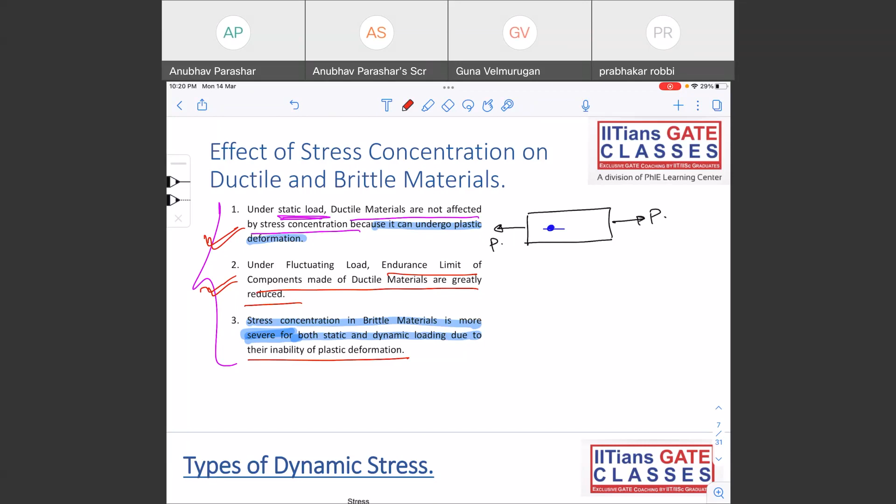Very nice, fantastic. Now let us go a little bit into the calculation part with theory. Let us try to understand, because simple numericals might be asked, not very hard ones. We'll do questions from previous year GATE. So let us understand a few terms before attempting numericals. So what are the types of dynamic stress?

This chapter is about dynamic stress, right? So let us first understand the different types of dynamic stress possible. The first one is called fluctuating stress or alternating stress. So you can see here, this is the zero line, and towards the right it is time, and this is the stress amplitude, or you can say maximum value of stress. This is the value of stress.

So how is the stress varying? You can see, right? The minimum value is greater than 0 here. Sigma minimum is greater than 0. I'm giving you one criteria: if sigma minimum is greater than 0, meaning the whole stress curve is above the zero timeline, then it is called alternating or fluctuating stress.

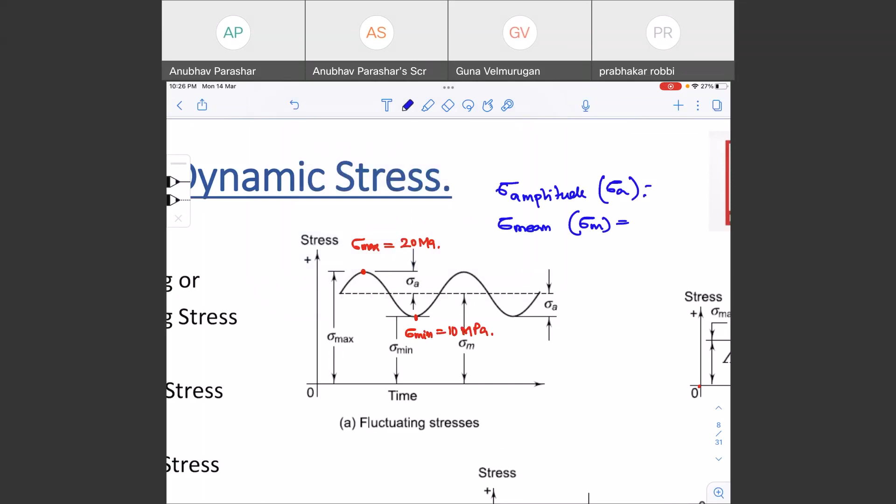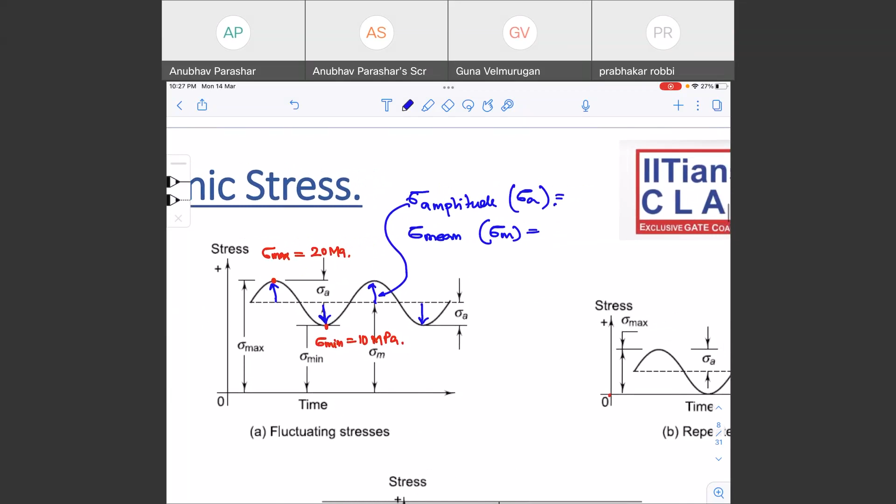What is the amplitude now? All of you please try to see. This is the amplitude, isn't it? थोड़ा सा graph आना चाहिए हल्का सा. This is nothing else but the amplitude. So how can I write the amplitude? I can write the amplitude as sigma max minus sigma min divided by 2. I have written the formula. Stress amplitude: sigma max minus sigma min divided by 2.

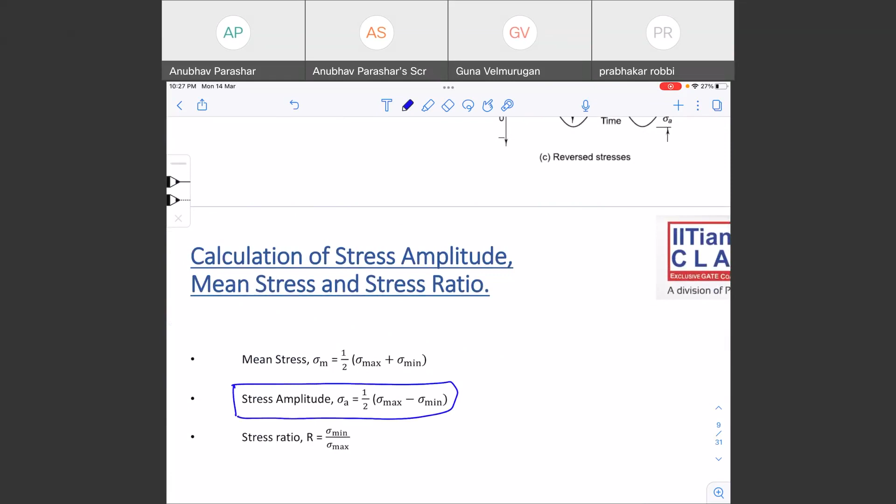Very nice. Then we have something called mean stress. How to write the mean stress? The mean stress will be sigma max plus sigma min divided by 2. So this is the value of mean stress. Right, already shown here. Sigma max plus sigma min divided by 2. Average, exactly. Right, average. Very nice.

So similarly, let us see what is repeated stress. So this is the value of sigma A, that is amplitude. You can see here sigma amplitude. Formula remains same. There is no difference in the formula. Sigma A is equal to sigma max minus sigma min divided by 2. And what is the value of mean stress? Sigma mean stress is equal to sigma max plus sigma min by 2.

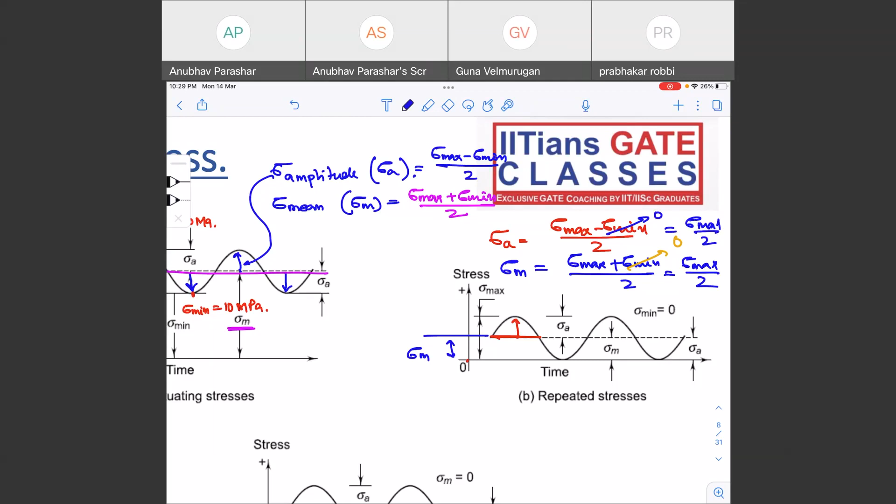And we know that for repeated stress, the sigma min value is equal to 0. So this is nothing else but sigma max by 2. Sigma min, yes, right? Sigma min 0 इसमें नहीं होगा. Sigma min will be 0. So this is also 0, you can see. This is also sigma max by 2. So in this case, for repeated stress, the value of sigma A and sigma M are equal. Right? This analysis you can also do it, no issue.

Okay. What is the value of sigma M for reversed stress? Tell me. What is the sigma M? Yes. Don't look at the diagram and tell. ढंग से. Try, focus more.

Write down the formula. Sigma max plus sigma min divided by 2. So in this case, if sigma max is plus 10, what will be the value of sigma min? Minus 10. Yes or no? I'm talking about the mean stress, average. So what will be the answer? Sigma max and sigma min will cancel out, so answer is 0.

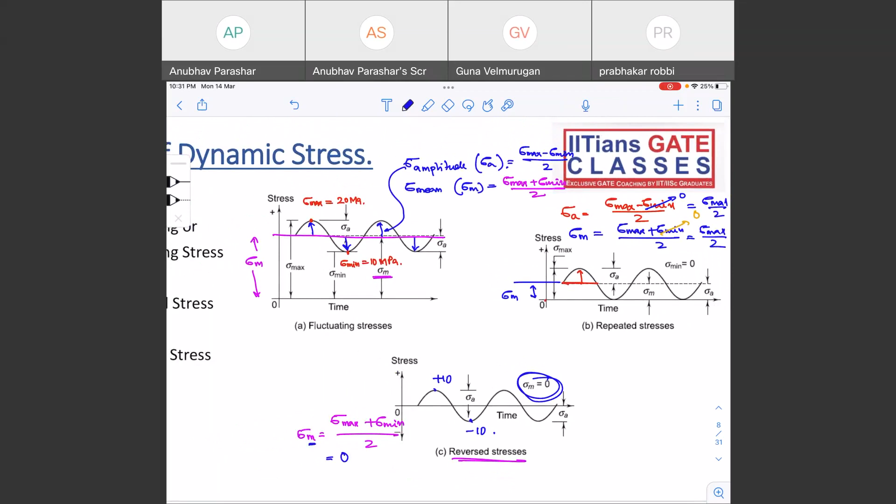Right? So these three stresses, you should have a little bit of idea about these three kinds of stresses. We'll talk about questions that are being asked. The questions will be numerical in nature, or you might be given a graph and asked the values of this. Okay. And there is one more formula, that is the stress ratio. So what is the stress ratio? Stress ratio is equal to sigma min divided by sigma max.

This ratio, I remember, it was there in my GATE exam, in 2015 or something like that. This was the first time it was asked, and I didn't know what stress ratio is. I was very confident with mean stress and stress amplitude, but stress ratio was not found in most of the books, and it was never asked in GATE before that. So I made some guess. I thought कि ratio है, तो obviously it has to be sigma max or sigma min, and options were 2, 0.5. But unfortunately I had done sigma max by sigma min, and it was a 2 marks question.

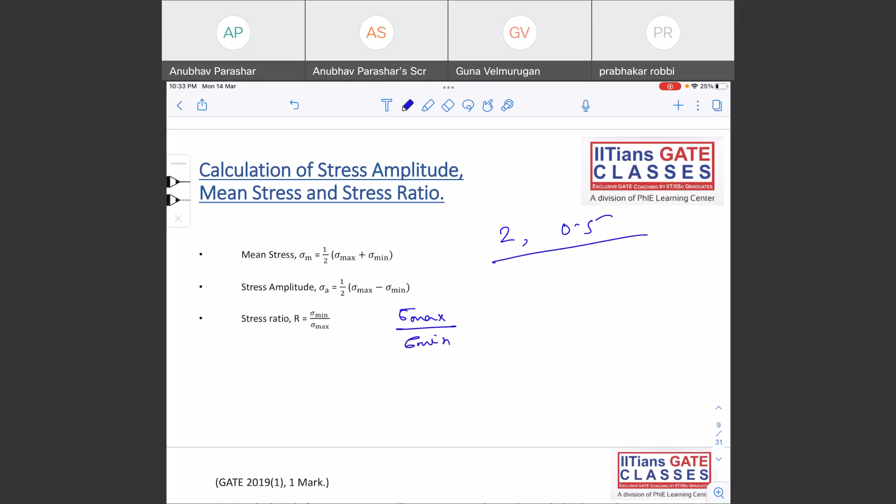In GATE 2019, it was again asked. A similar question, and this time they have given it. It's so good of them. They called it R ratio, and they have given it as minimum to maximum stress. So it becomes very easy now, right? But in 2014 or 15, I don't remember the year exactly, they had not given the definition, and it was a 2 marks question. Everything was calculated, but because I had done maximum by minimum, my answer was wrong. So all of you try this.

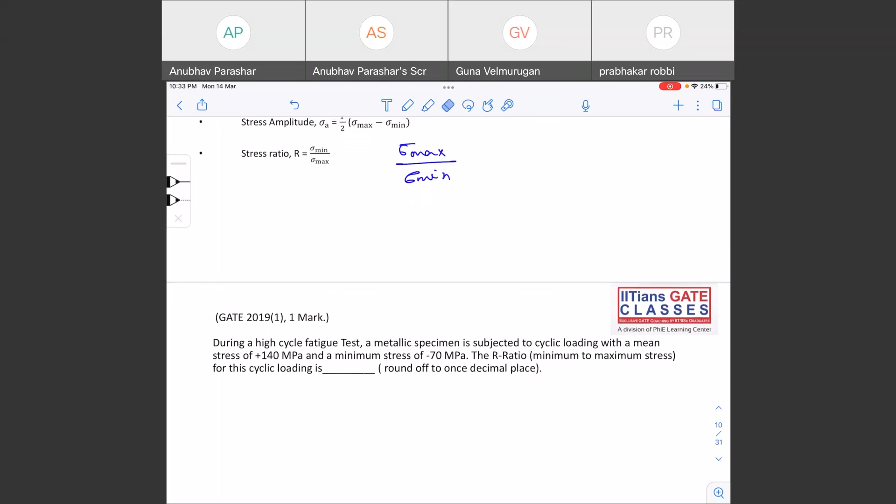This time it is a 1 mark question. I think that time it was a 2 mark question. I don't remember right now. That was the case. It's so sad. Everything was calculated. Only the last point I didn't know, and I made some guess, and that also went wrong.

Saying 0.5, let us see. Okay, let us try to see. A metallic specimen is subjected to a cyclic loading. The mean stress, sigma m, is given as 140 megapascal, and minimum is given as minus 70. Right? So you have to find out minimum to maximum. You know what the minimum is. You have to find out the maximum, right?

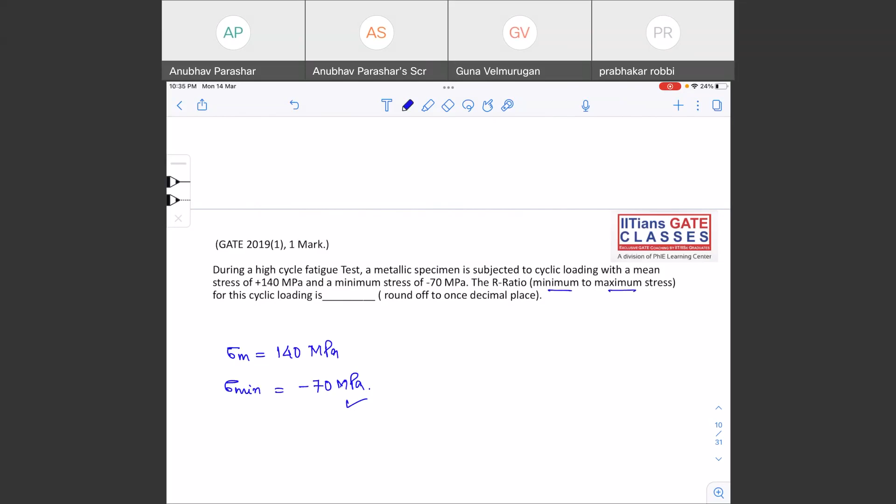So we know mean is equal to sigma max plus sigma minimum divided by 2, which is equal to 140. This implies sigma max is equal to 140 into 2 minus sigma minimum, that is 280 minus minus 70, equal to 350 megapascal. You have got the value as 350. So how is it 35? No, not 0.5 also.

You should read the equation properly. ठीक है ना? Just trying to be fast might cost you the selection. Along with speed, what is required is accuracy. First is the accuracy, then the speed.

So what is the R ratio now? Minimum to maximum. Minimum is minus 70 divided by maximum 350. So it is equal to minus 1 by 5. Round it off to one decimal place, then it will become minus 0.2. Right? I hope the things are clear.

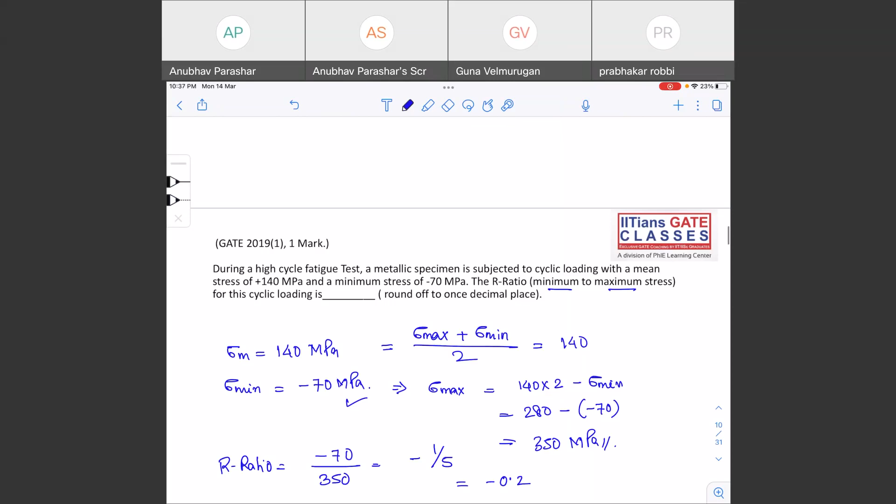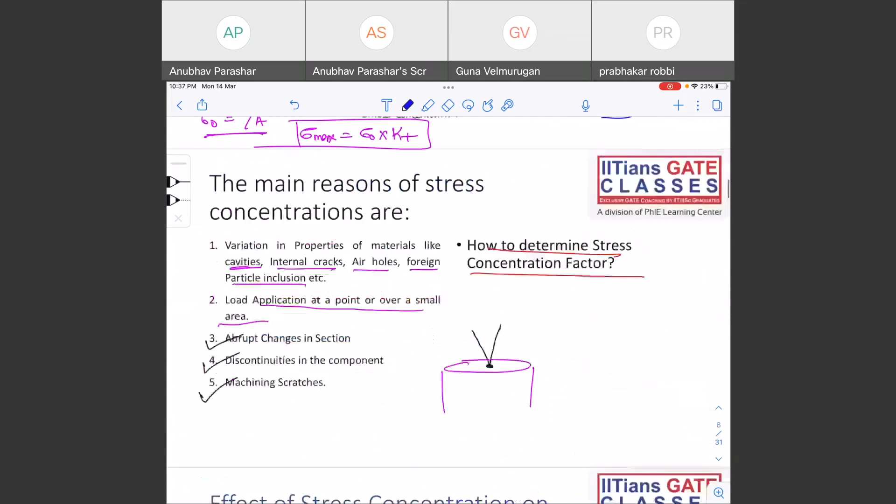We can continue, but I feel we'll continue next class because it's almost time. You might have other appointments. These are what we have to study next class. Next class, you have to be fast. You will not be able to cover everything at this speed because we have 5 lectures. This is more conceptual, you might be studying this for the first time, that's why I have taken some time. Next class onwards, we have to be a bit fast.

So, is it clear till now? Are we able to follow? You are finding my speed okay, but we have to be a little bit fast. There is no other option. We don't have the liberty of the 30 hours class that we generally have for machine design. So we have to speed it up. Next class will be fast. Please revise whatever you studied till now. We have a lot to cover.

We have to cover bearings, clutches, brakes, springs, gears, and joints. These are the chapters that have to be covered after this. This is approximately our second lecture, so we have 3 more lectures after this. So no issue, we'll be able to do it.